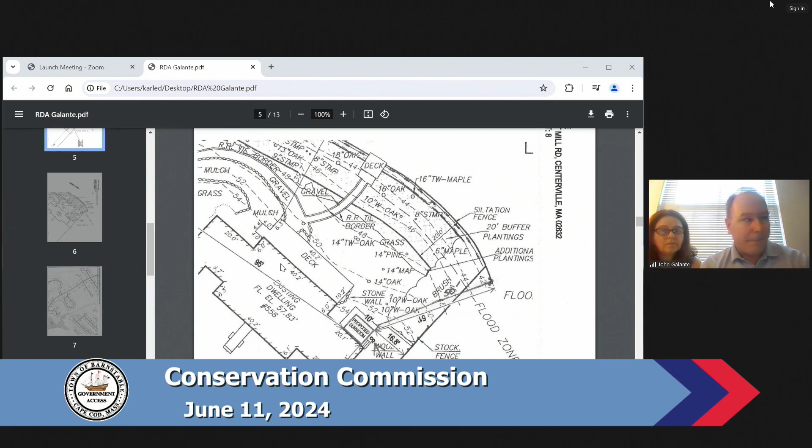Question from the commissioner. Yes, please. John, I was out visiting the house today, just wanted to confirm: right now the deck is on 4x4 posts or whatever, on the ground. You're just going to use that existing deck, and the room's going to be built on that deck, so there's nothing new touching the ground after this project—is my understanding correct? No, actually they are going to add some support pilings underneath to augment the existing supports.

I think a couple of them, because of the weight of the windows on the sunroom. So you're talking additional 4x4s or whatever they are. Yeah, I mean they're relatively minimal impact—they're the same sort of pilings they put in on the other deck underneath the structure, so they don't extend beyond the patio, and they're pretty minimal, but they support the weight. They don't build on the property; they bring the structure—it's a prefabricated structure that they assemble on site. Nothing is built on the property. Okay, all right, thank you.

So we just stay within the existing footprint of the deck, the existing one. Mhm. Any other questions from the commissioner? Seeing none—Channel 18, any public comment on this?

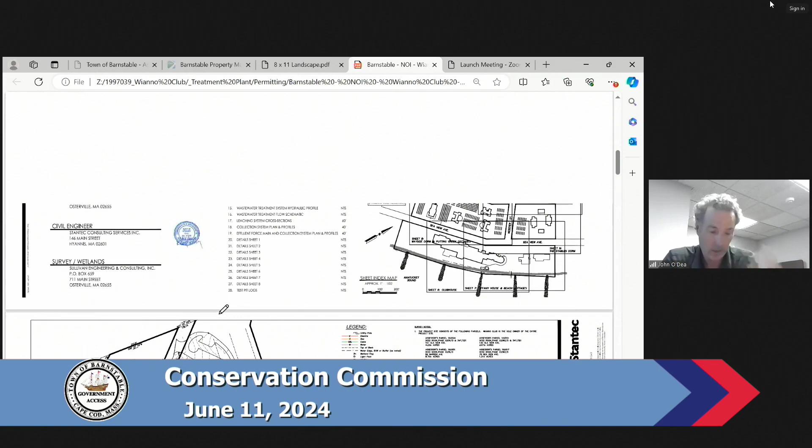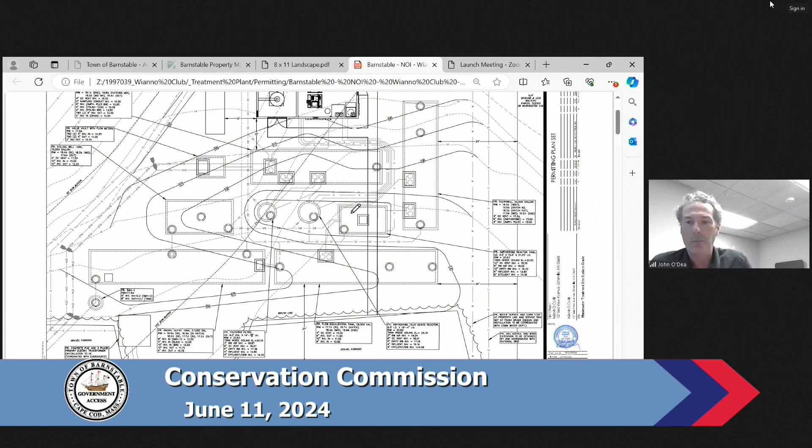Just to summarize our overall position on this project: the club is certainly working towards a long investment in these sites and the continued and future operations of the club, in replacing all of these individual Title V septic systems with this innovative treatment facility. This will certainly be an improvement to any of the wetland resources around.

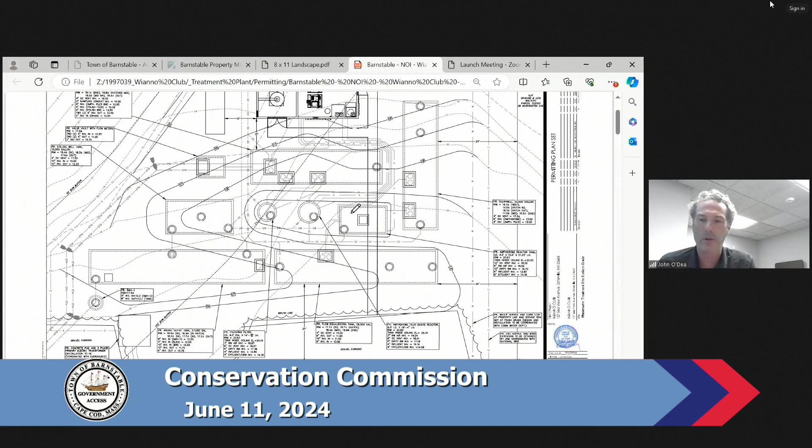So with that, Kevin, I'm happy to keep my screen shared if you'd like to give a little bit more detail about the guts of this treatment facility—I'm sure the commission would love to hear. Sure, thank you John. John, if you can get to the overall showing the leaching facility, and then we'll come back to this one.

The Wianno Club obviously has been around for a while. They've relied on a series of septic systems, essentially 3 very large ones and 6 or 7 small septic systems, with an overall design flow of approximately 25,000 gallons per day.

Because of that, we entered into an administrative consent order with the Mass DEP that gave the Wianno Club approximately 9 years to upgrade the facility and add a wastewater treatment plant. The Wianno Club has actually accelerated the schedule, designed the wastewater treatment plant, and is looking to start construction this fall, about 4 years ahead of schedule.

What we are looking to do is collect wastewater from all of the existing buildings and convey it to a centralized location at the northeast corner of the site, where we will build a wastewater treatment plant. After treating the effluent, it will then go out to subsurface disposal.

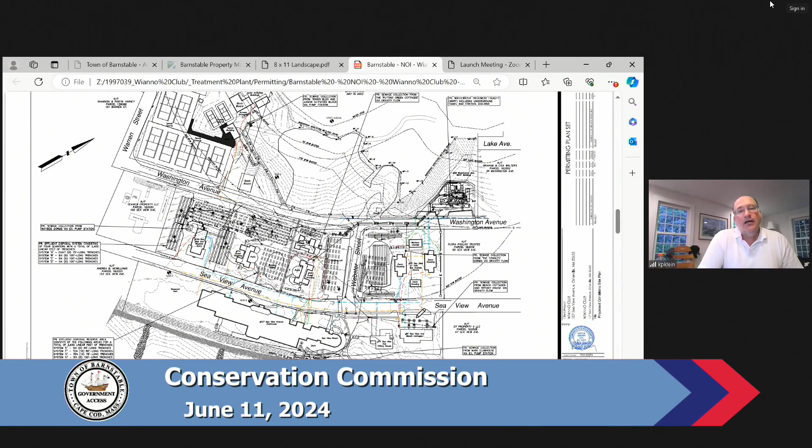John, if you can go to the wastewater treatment plant plan. So all of the wastewater for the site will be collected and conveyed up to the wastewater treatment plant. It'll use a series of gravity and 2 pump chambers, 1 pump chamber for the tennis facility, 1 pump chamber for the clubhouse, and actually a 3rd pump chamber for the dorms on the west side. The rest comes by gravity to the site.

The treatment plant is a biologically active filtration system, better known as an Amphidrome. It provides aerobic treatment, nitrification, denitrification, and then we've added a polishing filter to get even better denitrification out of this.

We anticipate a standard groundwater discharge permit. We've applied to the Mass DEP. They've reviewed the hydrogeologic report and the plans, and they have a draft groundwater discharge permit coming out in the next week or so. We anticipate the effluent standards will be 30 milligrams per liter BOD, 30 milligrams per liter TSS, and less than 10 milligrams per liter total nitrogen.

So the treatment system itself has been designed to meet those standards, and has actually been designed to do better than that. But those will be the effluent standards for this site.

I can tell you more about the treatment plant if you have questions, but essentially it's got a lot of redundancy. We added extra size, extra redundancy, and extra recycle capacity so that this site can accommodate the flows, accommodate surges, and treat it, recycle, and get the best level of treatment we can get.

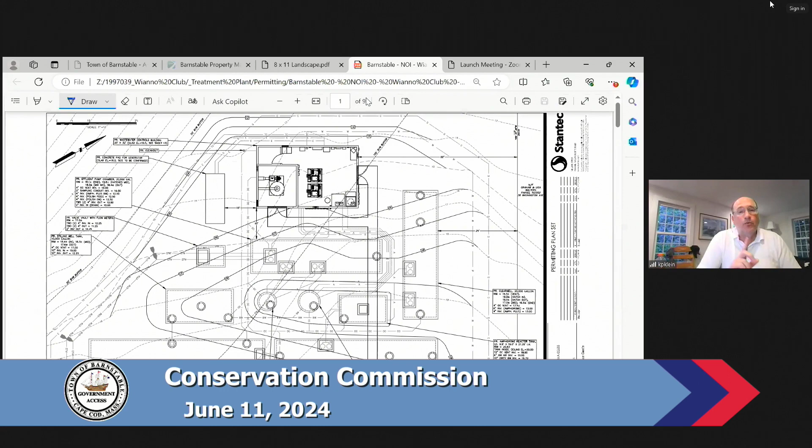Just one last thing I want to say: most of the treatment is in concrete tanks that are underground. We do have a control building that will house the chemicals, which are micro C, really a sugar solution, and sodium bicarbonate. They'll also house an odor control system, so we can treat and not have odors, and we can contain any odors, noises from the blowers. The blower is inside the building too.

So I have to confess, I'm an engineer, a wastewater engineer. So I know the Amphidrome system, and I know the system will work fine.

Any question from the commissioner? No one? John? Our John?

Is it part of the consent decree or your plan to monitor the effluent coming out to see if those standards are being met or exceeded? Is there a standard protocol for that monitoring? Yes, there is. The groundwater discharge permit will stipulate that we have a licensed operator on staff at the treatment plant at least 2 hours a day, 5 days a week. They'll do their own in-house testing, but then they will also on a monthly basis do influent and effluent testing, sent out to a lab, for BOD, TSS, and total nitrogen.

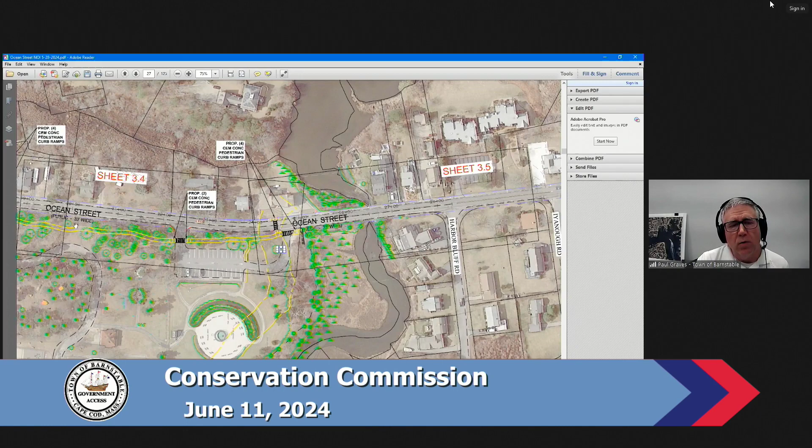This depicts the proposed shared use path, which will meander through the park. We'll avoid trees where we can, and it continues as far as it can—flipping back to the other screen, we pick up here. Really, the only opportunity for pedestrians from there until we reach the other part of the shared use path is walking on the shoulders. All of this work is within the town road right of way or on town properties.

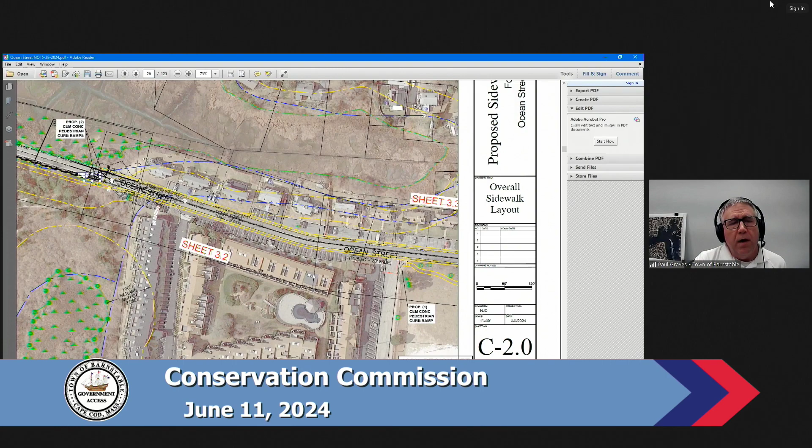When we get down just past the condominiums, we can pick up our proposed shared use path, and that continues all the way to Kalmus Beach, including right up to the entryway for pedestrians to get onto the sand. But we're not doing any work on the beach proper.

So thanks—a couple quick questions before I go to the other commissioner. On the write-up, you mentioned a new gate. Can you show me where your gate is? Yes, let me go to the more detailed plan, but it's just going to be shown essentially schematically.

Oh, I see. Well, it will be at this driveway, close to the two arrows. I think the gate will be closed. Here's the call out for it down here: proposed automated entrance gate. I'm sorry, I was missing where that was, but the gate itself will be across this end of the driveway, and that will be at the appointed times that the town gates that off.

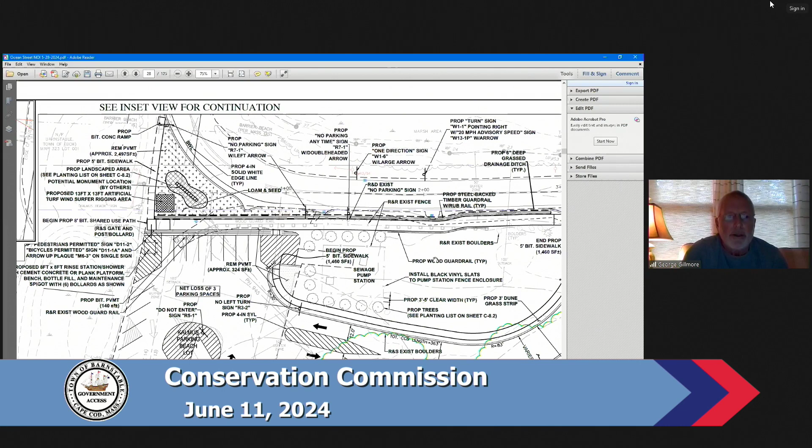They could value putting in some lower type of planting. That's what I wondered too. Yeah, I mean, we could mix in some goldenrod and things like that besides just the grasses.

If I may, Mr. Chairman, I just wanted to point out, I don't think we've called it out here necessarily, but our intent was to have the contractor stabilize the disturbed area, and then our structures and grounds folks would do the landscaping, probably, and we were planning to consult with yourselves and anyone else who's interested. But our thinking is it would probably make sense to essentially view it as an extension of the beach vegetation, which is going to be right next to it.

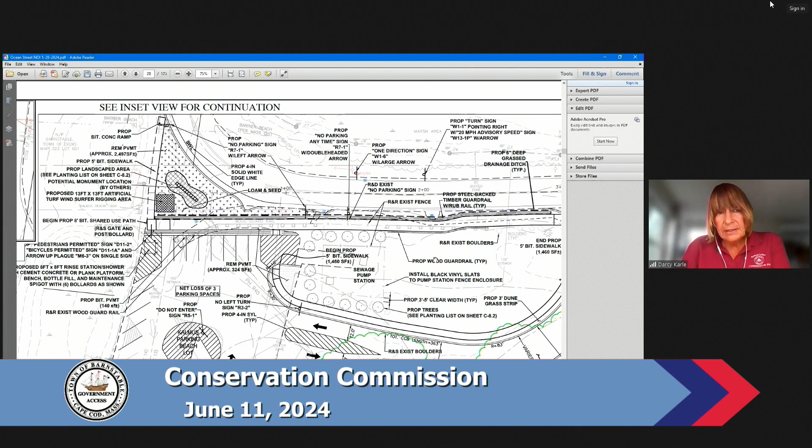We're open to whatever you want to propose, but I just wanted to let you know that the loam and seed would be an interim measure until it gets planted more formally. If they can just talk with me, we could either do it with some of what we have for suggestions for the beach habitat, or we could see whether the town manager, who signed off on the monarch butterfly garden type of thing, would let some of that be brought in to handle it.

Thank you, John. Well, actually, I had the same question as George, and I'd add that I don't know how much disturbance of vegetation will occur throughout the entire project area, especially with the walkway, etc. But I think we need a condition not only for that area that George was talking about, but also a condition that all disturbed vegetation will be replaced in kind, or with the prior approval of staff.

I think, Paul, you said there may be some trees taken down. Did I hear that? Yes, okay. We've been in consultation with the town tree warden about that. Actually, some of the trees that will come down are crowded. He views that—I don't want to talk for him because I'm not him, but...

My impression from talking with him is that he may decide to put some new plantings in after we do the work, or in some places it may be beneficial for the existing trees to have more space to extend their canopies. And what I'm suggesting is that as we write this order of conditions, there be a condition that any disturbed vegetation would have to be replaced in consultation with staff, subject to a planting plan reviewed and approved by staff, along with the area that George had just talked about. So that's what I would think we should put in the order.

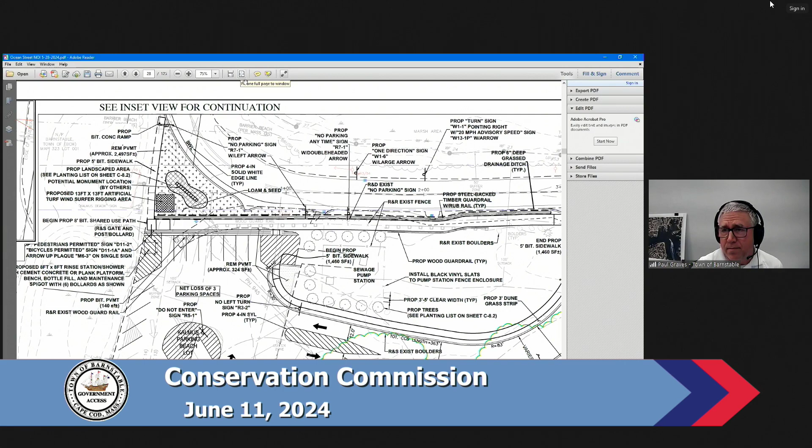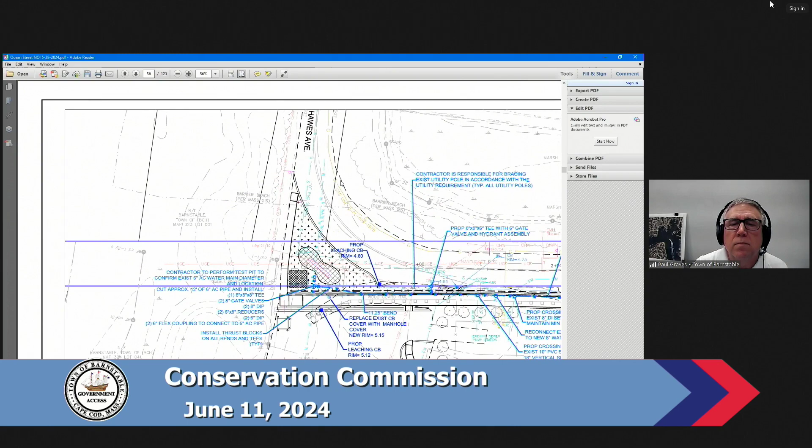Would you like me to flip to the utility plan? Sure. Okay, I'll try to do that as quickly as I can. Let's see. Yes, that's it, let me zoom in a bit. Why am I having trouble seeing it? The blue line with the W. Yeah, okay, here it is.

New 8-inch ductile iron water main extension. Yes, yes, oh, so I guess it is just along the shoulder. Correct. I thought there was a place up here where it was partly in the road, but no, I guess it's mainly in the shoulder. Yeah, a little bit in the road, but mainly in the shoulder.

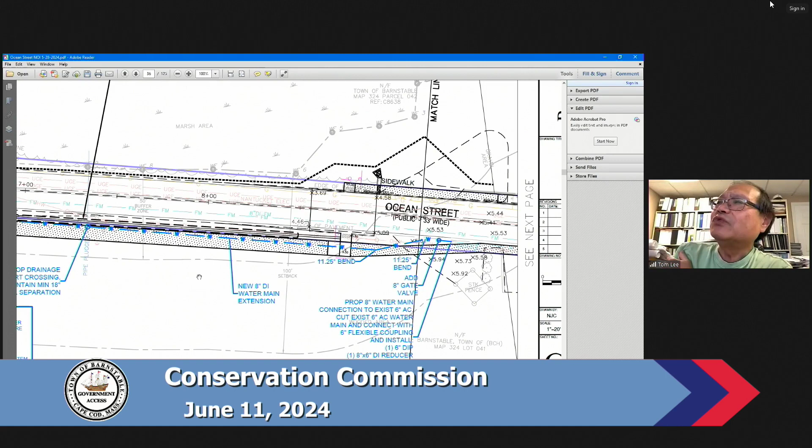Okay, the other question I have is we're still waiting for the DEP number, so we cannot really close this hearing depending on how it goes. So just want to mention it. So, one last chance, any other comment from the commissioner? None? Darcy, do you have any comment? I have nothing to add, I think it's a great project.

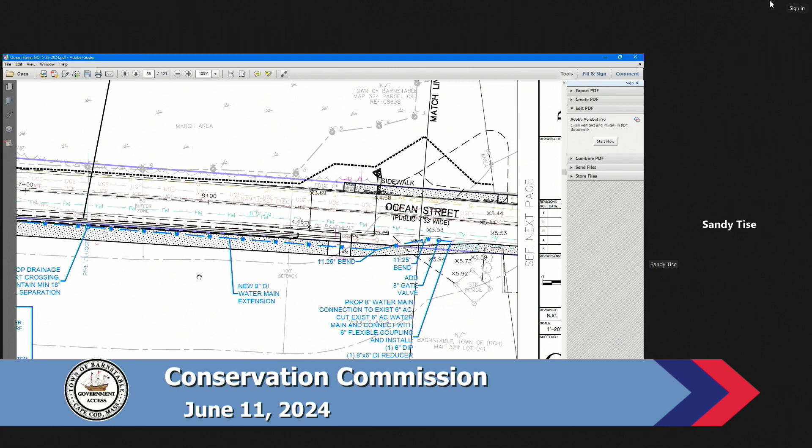Thank you. Any other public comments? Can we get her address, Sandy's address? Oh, Sandy, yep, what's your address? 467 Ocean Street.

Thank you. Great. Any other questions? Channel 18, any public comment? Seeing none.

Paul, I need a continuance because we're still waiting for the DEP number. I'm thinking about the 25th. We can approve this project, but subject to the receipt of the DEP number, so the continuance date will be the 25th. Would that be fine with you? Yes, thank you.

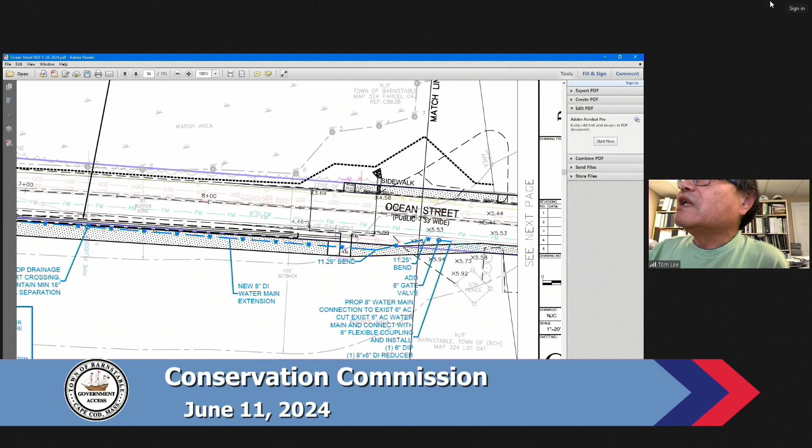Let me try this if I miss anything. I reviewed the stormwater report, it's fine. The only thing I want to add as a condition is doing a perc test to verify the infiltration rate during construction, so you have a chance to compare the proposed leaching rate versus the actual leaching rate.

So let me try this. Could I have a motion to approve this project subject to the perc test, infiltration test during construction to confirm the infiltration rate, and second, any disturbed vegetation in the buffer zone area to be revegetated in consultation with staff, and a continuance to June 25th waiting for the issuance of the DEP number.

So moved. Second. Anyone second? Roll call. Cavadili, aye. Gilmore, aye. Lee, aye. Sampo, aye. Tangney, aye. That's unanimous.

Thank you. Good luck, Paul. Thank you. Thank you, Mr. Chairman and Commissioners.

We have two continuances. The first one is Raymond Martin, installation of a proposed access stairway, pier, ramp, and float, removal of 4 trees and vista pruning at 40 Bay Road, as shown on Assessors Map 007 parcel 040. This is a continuance from May 28th.

The quorum is everyone except myself and Bill, but Bill is not here, so the quorum is everybody. So you only have 4, so you need 3 votes to approve this.

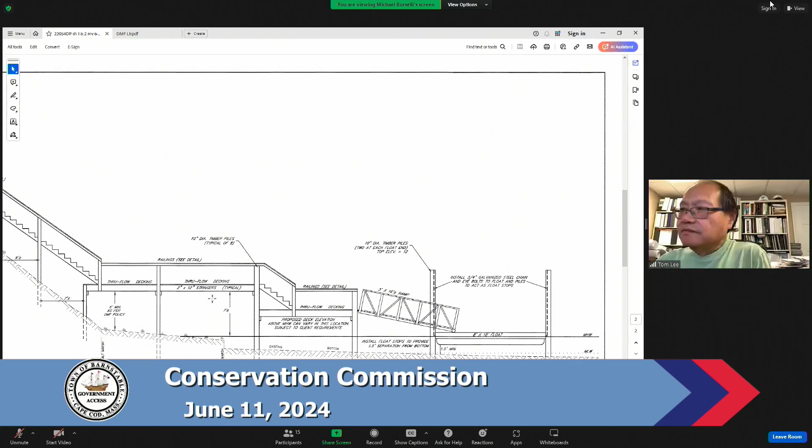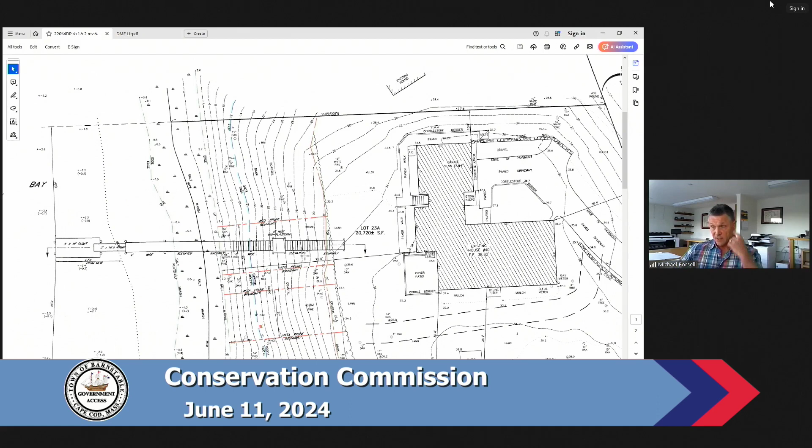In the initial application, another reason we wanted the pier closer to the property line was to allow us to put the access walkway where we wanted to do vista pruning, since this is the preferred view window. But after comments from the commissioners at the original hearing, we shifted the walkway. We'd like to reserve the right to still do vista pruning in that area, plus a second vista pruning area where the dock is going to be. It's my understanding there's an opportunity to provide 2 windows, so we're asking permission for the 2 windows.

Okay, yeah, we do give permission for 2 windows. This is a fairly narrow lot. Darcy, any comments on this? Do you have any problems with the 2 vista pruning areas? Well, I think with the width of the property, I don't think those 2 windows are that extreme of a request, so I don't have a problem with it. Okay, thank you.

With regard to the vista, I have no problem with the vista the homeowner was looking for from his primary area. I do have some trouble, Darcy, with that second vista given the width of this lot. I'm okay with clearing any necessary vegetation that might impede over the dock, but why do we need another fairly wide vista on either side of the dock? That seems kind of unusual to me. As opposed to permission to say you can prune back vegetation that might impede the dock access, I don't know why you need that second vista on a steep bank. I just have some trouble with it.

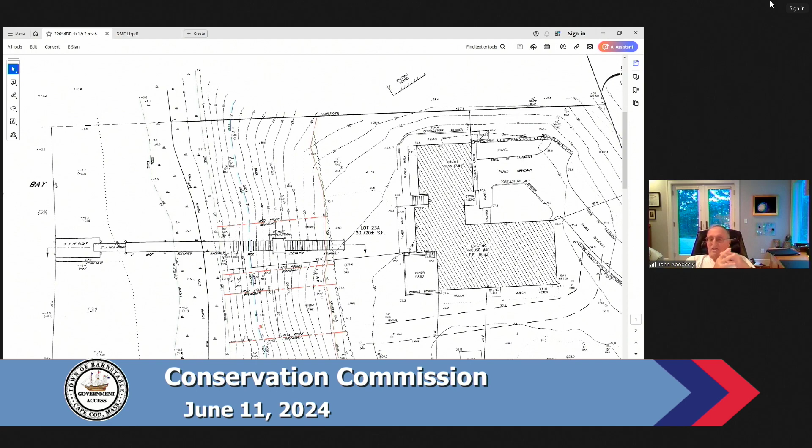So again, what Mike suggested, after the dock is in, if he wants to meet with staff and get an okay to do some cutting on either side, minimally necessary for access to the dock, I'm okay with that. He can put that in the order. So that's just where I'm coming from.

Okay, yeah, I'd agree. That's acceptable to us. Any other questions from the commissioner? Seeing none.

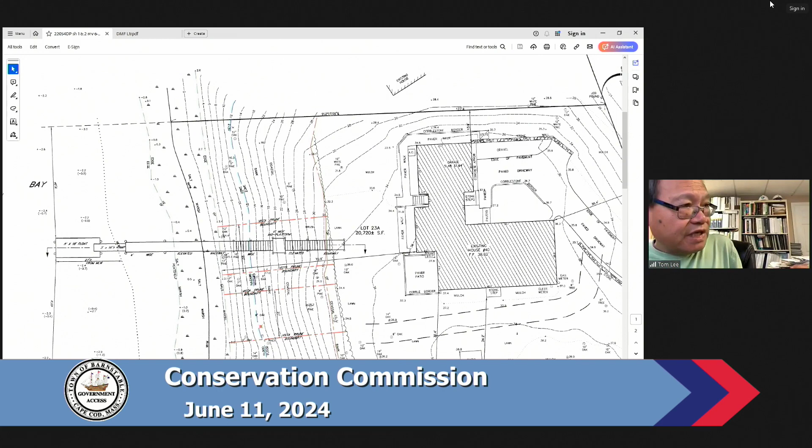Channel 18, any public comment on this? Seeing none. Could I have a motion to approve this project with the revised plans dated June 7th.

Allowing the standard vista pruning for the primary, and then the secondary trying to minimize the vista pruning, in consultation with staff after the pier is installed. So moved. Second. Roll call: Daily, aye. Gilmore, aye. Tangney, aye. Sampu, aye. That is unanimous.

Thank you, thank you very much, good luck, commissioners. Have a good evening. Chairman, commissioners, thank you very much for your due diligence.

Okay, thank you. The second continuance is Town of Mashpee, proposed maintenance dredging at the existing approach, inner and 1916 channels within Popponesset Bay that extends into Barnstable. This is a continuance from May 14, May 28th, and June 4th. The quorum is everyone except George.

Hey Tom, yep I'm here. My name is Paul Mancuso, I'm a wetland scientist with the BSC group here presenting the proposed maintenance dredging of the approach, inner and 1916 channels within Popponesset Bay on behalf of the town of Mashpee.

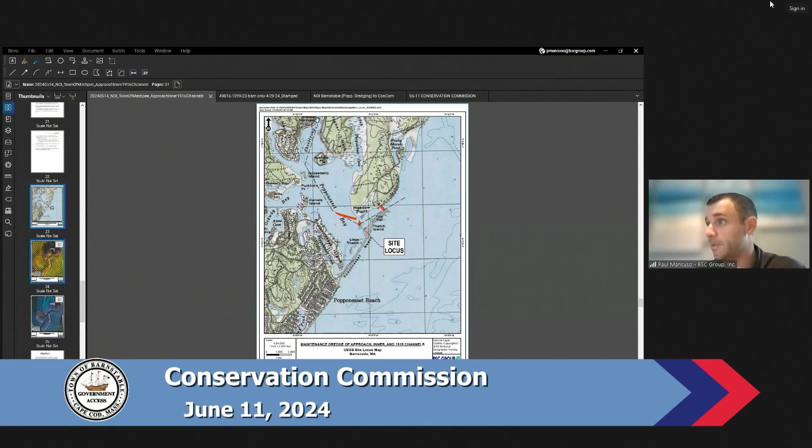Can you see my screen? Yes. Okay, so I was here about a month ago and presented the project, but we were waiting to hear back from Natural Heritage and DMF. We have heard back from DMF. Natural Heritage has a few more days, I believe the 14th is the end of their 30-day review period, but they have not gotten back to us.

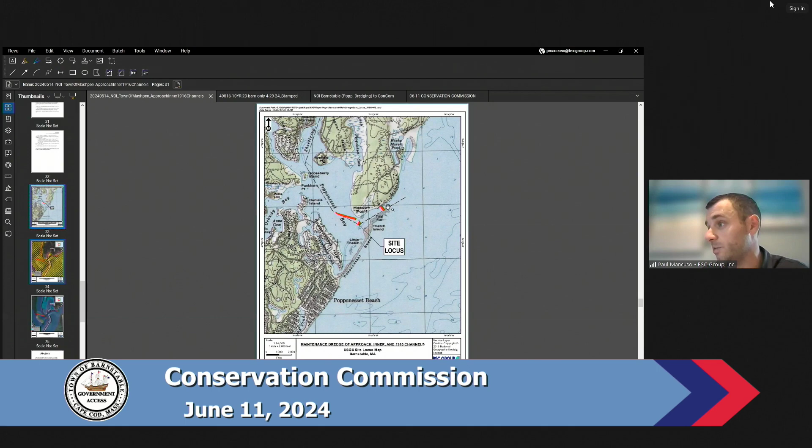But this is a maintenance dredging project that has been permitted in the past. The permit expired, I believe, about a year ago. The project site is here in Popponesset Bay. There are three channels that exist within Barnstable, but also exist within Mashpee. Here's the town line, so I'm going to go to the plan set now.

So we're going to zoom in here to Popponesset Bay, and you can see these are the three channels here, which exist in Mashpee and in Barnstable. These channels have all been permitted for maintenance dredging in the past, but the permit for the sections in Barnstable expired before we could extend them, so we're here re-permitting them. The maintenance dredging is allowed in perpetuity in Mashpee based on the certificate of compliance they initially issued.

So for these three channels, this is the approach channel to Popponesset Bay. As far as the portion in Barnstable, there is 18,369 square feet. The prior permit included 978 cubic yards of sediment to be dredged annually from the Barnstable section of this channel. However, based on current needs, no dredging is proposed based on the current profile. If a big storm were to come in and fill in this channel, they would like to have the permit to dredge that area if necessary, but currently there is no dredging needed.

No dredging is needed within any of these three channels currently, but this is just in case a storm were to fill the channels in. This is the inner channel, mostly in Mashpee, with a portion in Barnstable of approximately 11,187 square feet. Currently no sediment needs to be dredged here, but the prior permit allowed 676 cubic yards to be dredged from this channel annually or on an as-needed basis.